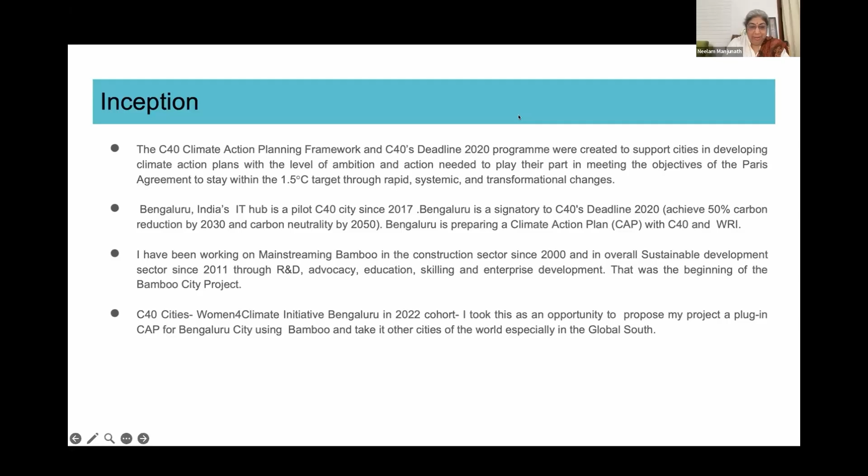And okay, sorry, this is just a moment. Just a moment.

This is the project at a glance, generally taking Bangalore as a pilot. That's the area and the latitude. We have tried to make it into a proper project.

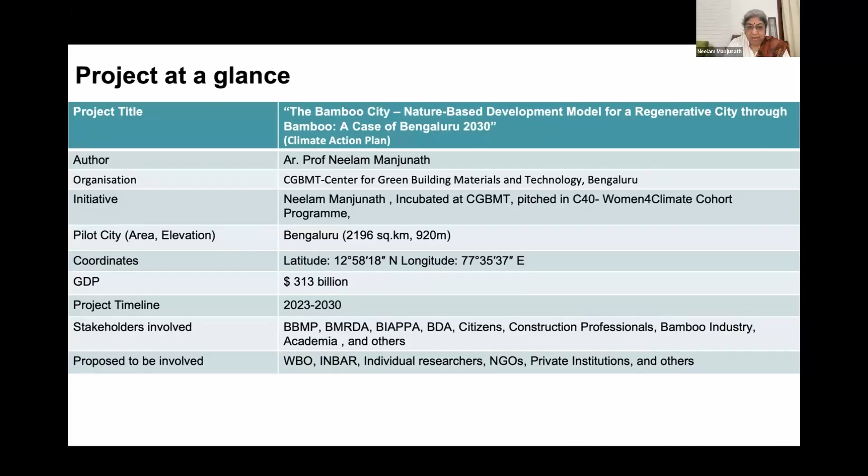The stakeholders are local civic bodies and government bodies, industry professionals, and international organizations like WBO, INBAR, and many others which we are planning to involve and collaborate with one by one.

The important sectors addressed - I am not just talking about construction with bamboo. This city project actually talks about urban greening, air quality, water resource management, energy and waste management, community resilience, and the well-being of the overall citizens.

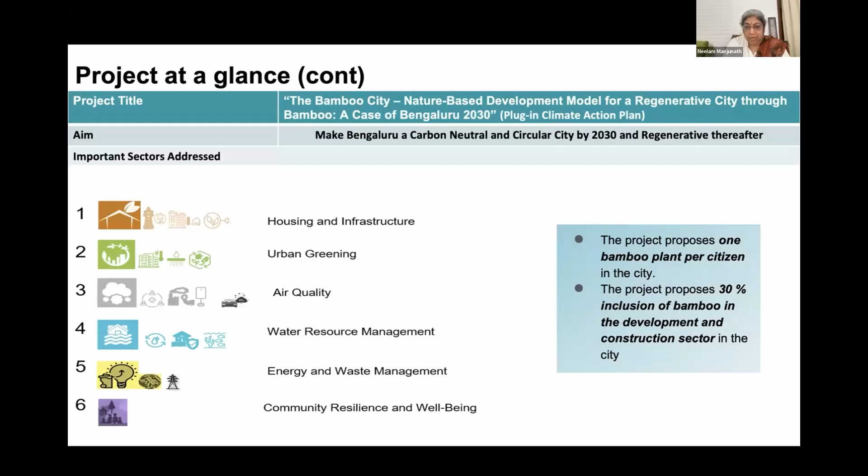There are two very simple actions that I have proposed. One is that we plant one bamboo plant per citizen in the city. The second one is that we have 30% inclusion of bamboo in the development and construction sector.

Why is bamboo a nature-based solution, which I call NBS? It has very dense foliage. It absorbs 400 kilos of CO2 per plant per year, and releases so much oxygen. Decomposition fortifies the soil with the fallen leaves, and there's a lot of leaves that fall.

The rhizome holds the topsoil together and prevents soil erosion. It also changes the microclimate through reduction of temperature and increase in the water table. It helps in removing toxins from the soil, which is phytoremediation, and it reduces dust levels by 70 to 90%.

Bamboo also enables displacement of plastic, which is a very important topic everyone has been talking about - the green circular economy. And renewable energy from bamboo, through gasification - I am more focused on gasification and renewable energy from bamboo waste from industry.

Bamboo is a pioneer for preventing soil erosion, enrichment, reforestation, carbon sequestration, and regeneration. Bamboo is part of a regenerative cycle - most bamboo enthusiasts know this.

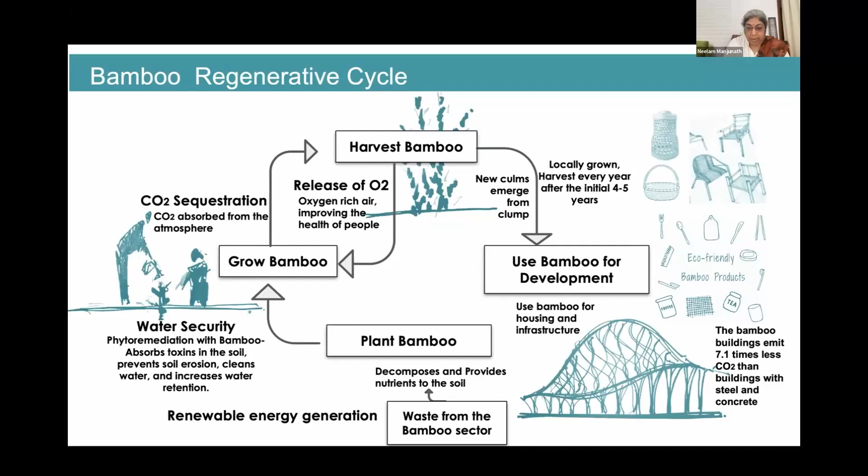This is a common thing everyone asks: why not other trees, why only bamboo? We know bamboo grows very fast, so we don't have time to wait for slow-growing trees to provide all the oxygen and urban greening we're talking about. That's where bamboo comes into the picture.

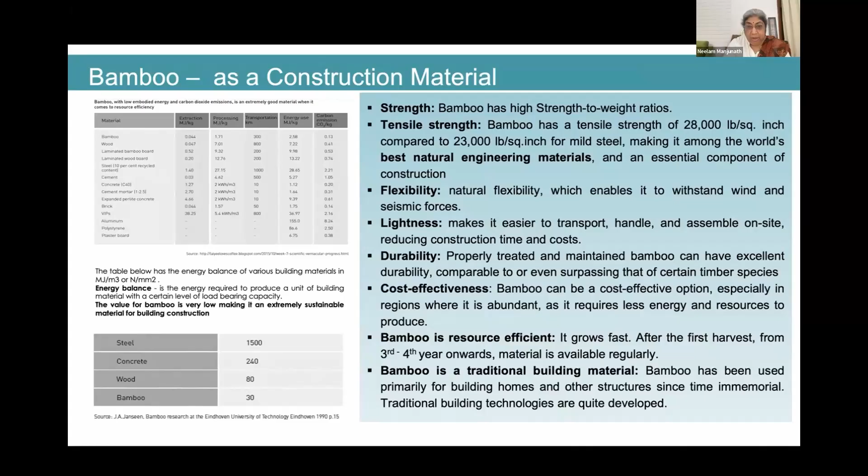As a construction material, which is the topic of this forum, bamboo has got all these properties. Many people in the forum know about its strength and tensile strength, the very good flexibility it has, because of which it can withstand wind and seismic forces, lightness, durability, and cost effectiveness. All these properties are there. I think one of the biggest, most important is that it's resource efficient, and it's also a traditional building material, so people know the material very well in most countries where it grows naturally.

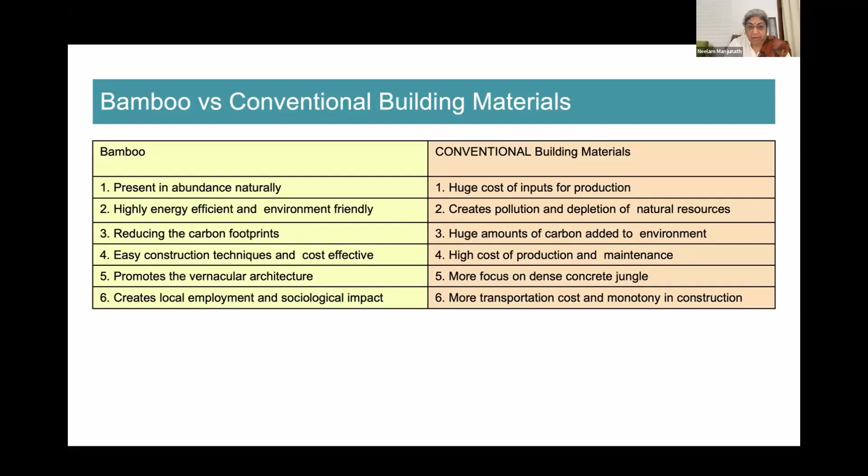There's also bamboo versus conventional building material in terms of abundance. Bamboo is highly energy efficient and eco-friendly, reduces the carbon footprint. We also have easy construction techniques, until we really want to make it complicated - that's a different thing altogether. It's cost effective, promotes vernacular architecture, and creates local employment and sociological impact.

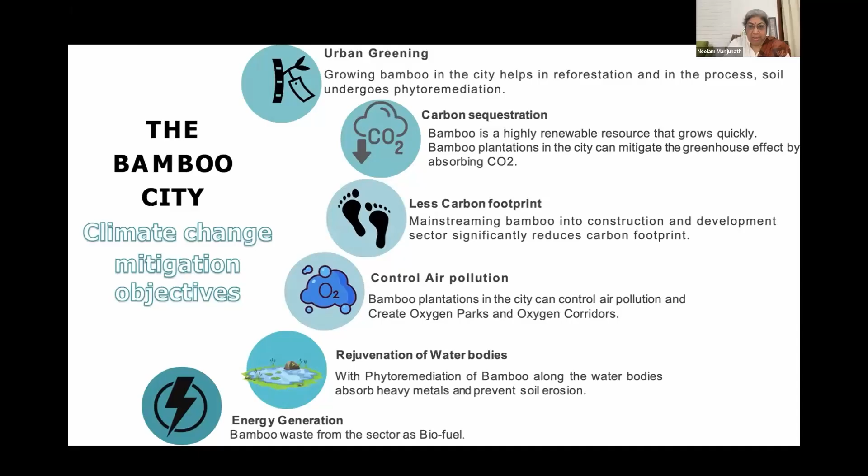The bamboo city's mitigation objective is climate change via urban greening and carbon sequestration. We have less carbon footprint through development, controlling air pollution, and all this rejuvenation and energy generation we're talking about. Now, can we make a bamboo city anywhere?

No. What we propose is wherever bamboo has been growing and being used so far - it grows naturally and is being used by the people, and people are used to it - that's where we propose it. Bangalore was one case where we have a lot of bamboo, and it grows naturally in Bangalore and the nearby areas.

We have a lot of bamboo markets strewn across the city, and lots of local craftsmen on the roads in many places who have been working for generations. We also have a lot of R&D institutions - the Indian Plywood Industries Research Institute is here, and IWST, the Institute of Wood Science and Technology. There are many other organizations working with bamboo, premier institutes in Bangalore, India.

In terms of development, we had the Bangalore International Airport, which was the first in India to use bamboo in an airport. I'm very proud and happy to say, as a material expert, I was contacted by SOM New York for vetting the design of this particular project and for providing information on how to use bamboo in a project like this.

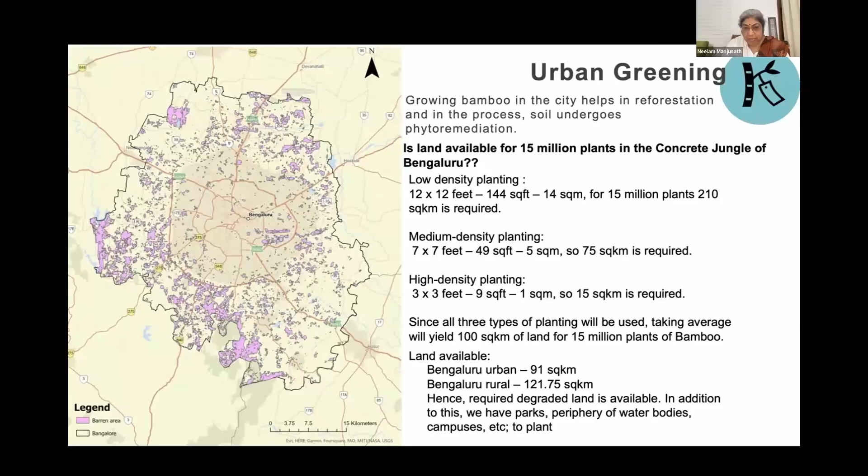So we went around one by one, understanding whether we have land available and what kind of lands we can actually touch. For urban greening, we tried to identify what kind of lands are available and what kind of density planting we can do - things like 12 by 12 feet and 7 by 7, generally with mixed planting, depending on land availability. This was one exercise we did.

We also had our scientists who have been working on bamboo in Karnataka identify different species for plantation in the city, their properties, where they can be planted, and their usage post-harvesting. We did this exercise very early in our project.

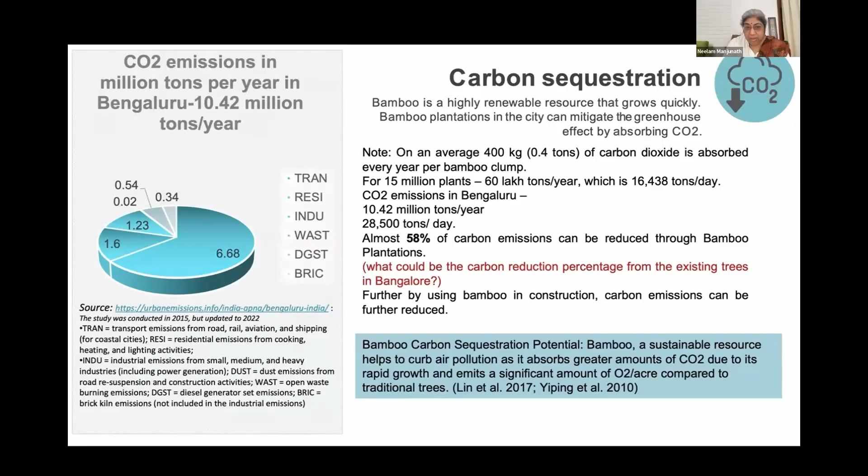Looking at how much carbon sequestration I'm trying to do by planting one plant per citizen, and how many plants Bangalore will require to become carbon neutral in the next decade, we did a back calculation starting with the CO2 emissions that Bangalore actually produces. We found that if we do one plant per person, we can mitigate almost 58% of carbon emissions through bamboo plantations.

This can be done in different ways through oxygen corridors and parks. All of us have heard about oxygen parks and corridors, which have been done in small pockets across the world. Here, we are trying to figure out, per person, what we are proposing. One bamboo per citizen is very difficult to plant, but do we need that, and how are we going to go about it?

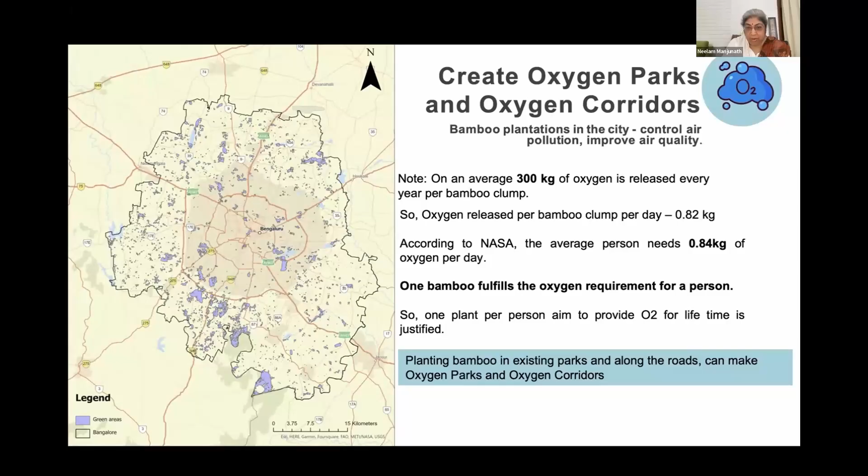The amount of oxygen released by one bamboo clump almost matches what a person requires per day, so we thought this was a good thing to pursue. Through this, we also looked at rejuvenation of water bodies and lakes, the Raja Kaluves, which are the catchment areas of lakes in Karnataka. There's phytoremediation, water quality improvement, water retention improvement, and other side benefits to planting bamboo.

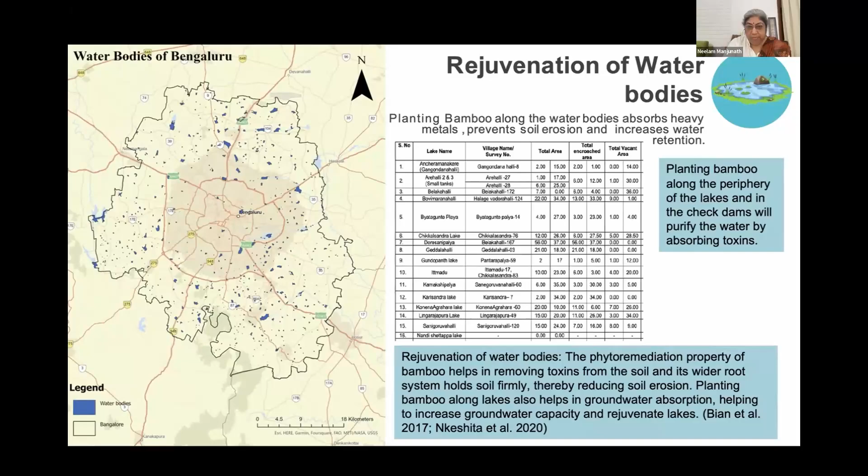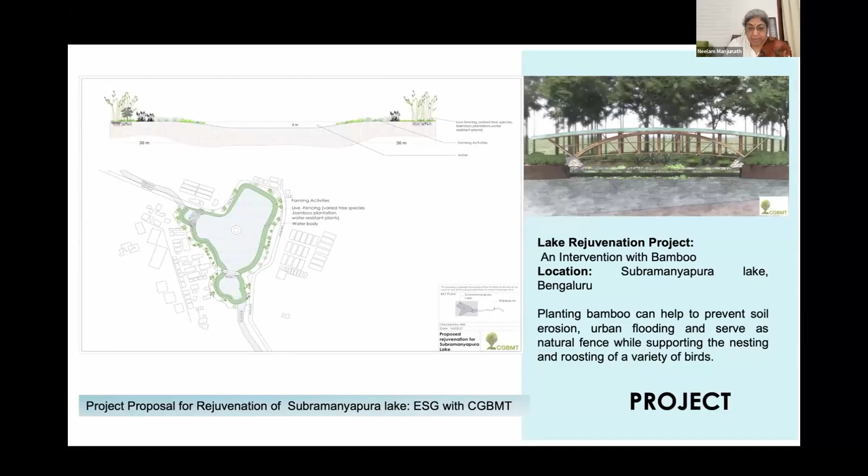We looked at cases done before in other parts of the world. Before COVID, we were asked by Environment Support Group, an NGO in Bangalore, to propose a lake rejuvenation project using bamboo, and we submitted this to the High Court of Karnataka. It has been approved for implementation.

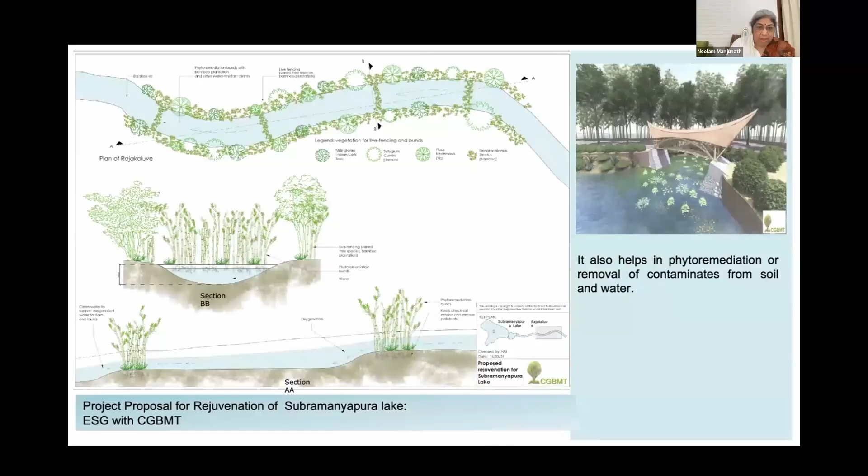We had check dams and other infrastructure done with bamboo, like bridges. That's what we did. Now we're coming to buildings.

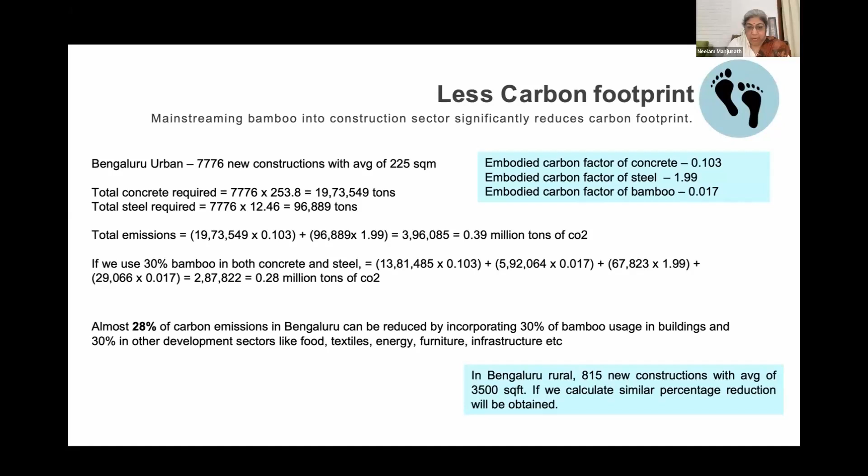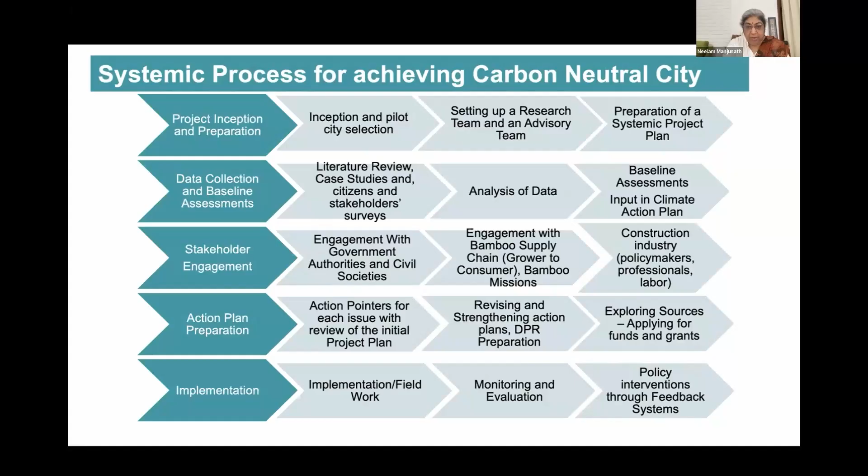It keeps working because every time we encounter new issues, we go back and talk to new stakeholders, conduct surveys, and form collaborations. We keep going in circles, and we've kept it a very dynamic framework through which we are working on this project.

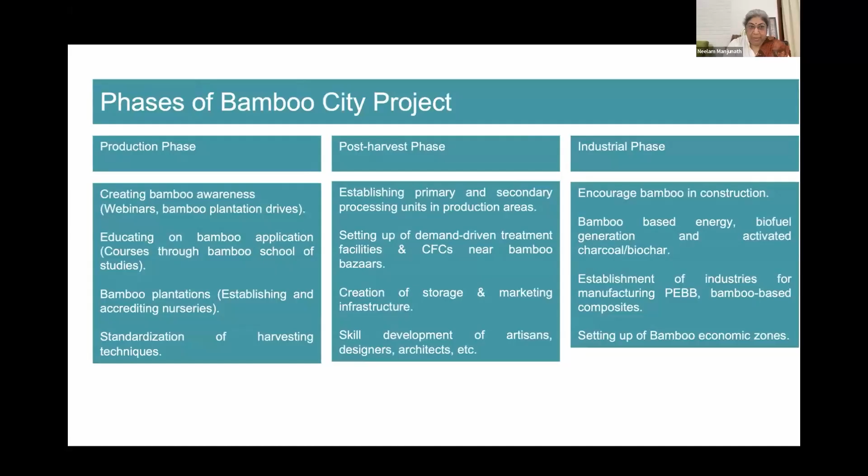And these were the different phases that we looked at, from production to post-harvest to industrial phase.

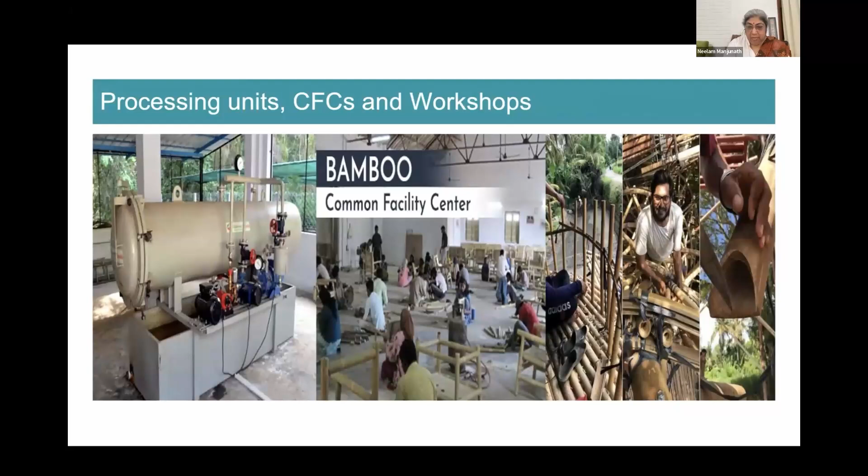But the other two parts we really have to work a lot on in the city, which could be looked at in north, south, east, west, four common facility centers at the edge of the city to start with. Gasification from the waste that will come out from the industry.

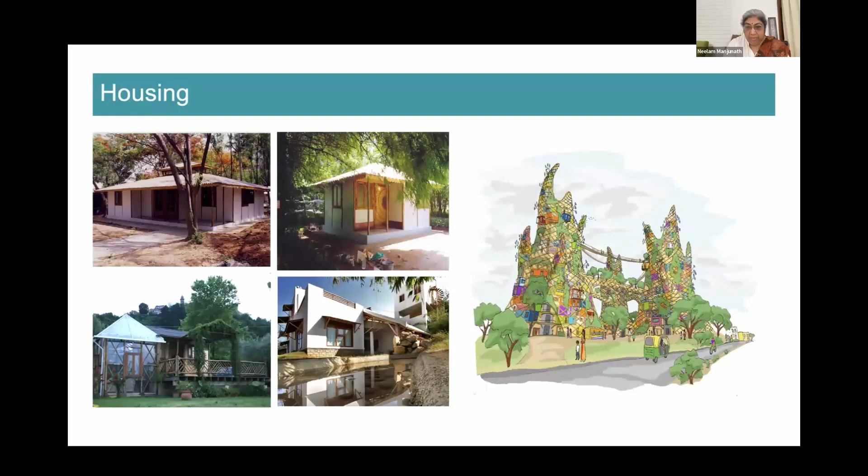The other projects, most of them are my own, which I have been working on since '99. They have been housing, starting from a 2-bedroom house to an upmarket house, to a prefab house, EWS economically weaker section house, and slum. What you see on the right side is actually for the slums. It was a slum development program for which we got an international award for this particular project.

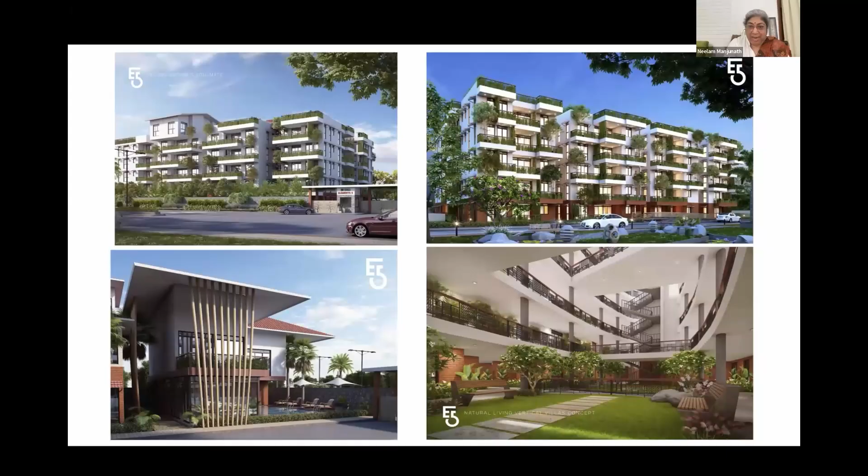Again, even in the normal housing of day-to-day people, because I don't work at either the shack or the 5-star deluxe hotel level. I'm talking about people in between, which actually form 99.9% of the population, and the buildings which fall within that range. I work towards Bamboo City working towards that kind of architecture and that kind of construction that we are actually talking about.

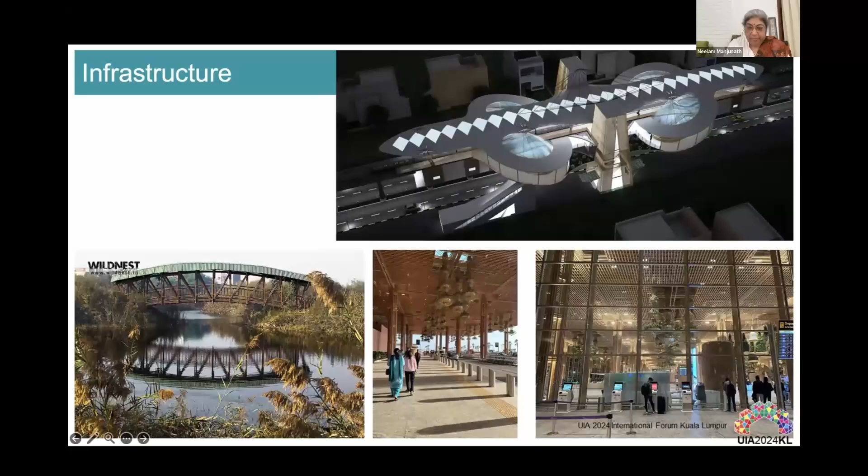This also won the Rethinking the Future Award in 2017. Unfortunately it has not been built so far, hoping it will happen very soon. Then we have bridges that can be done with bamboo, and smaller community infrastructures like bus shelters, public toilets, rain shelters.

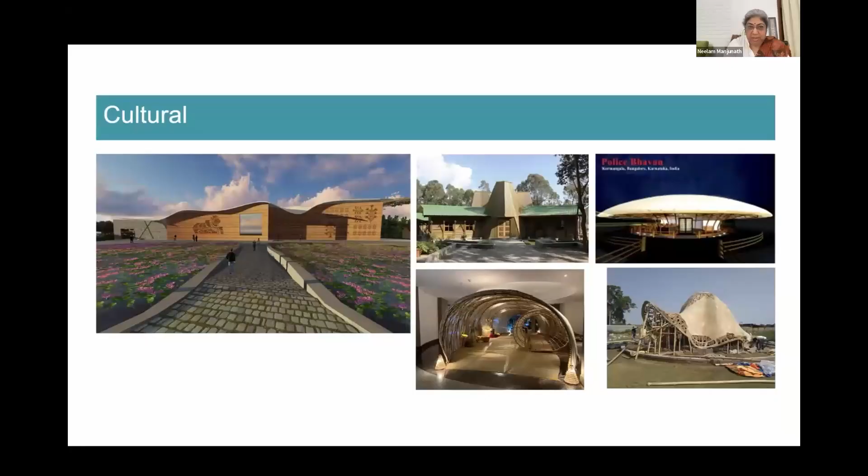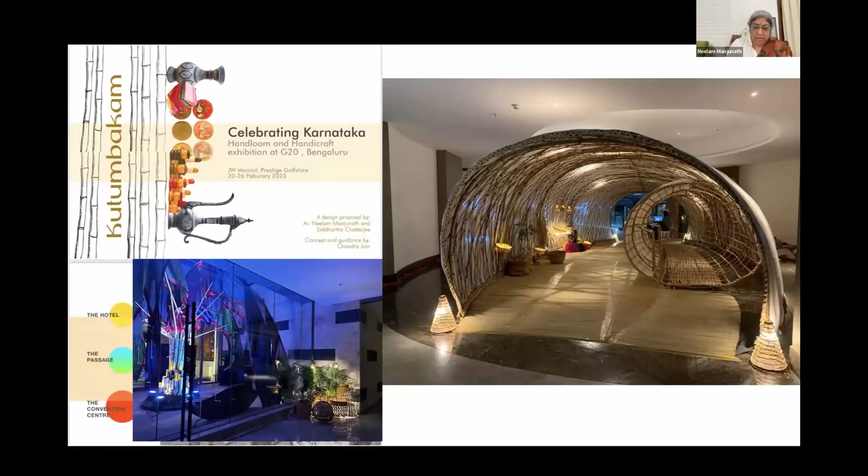Cultural structures like museums and other kinds of exhibitions. This is what we did for the G20, which had to happen in Bangalore. We were called to do that. We can also do lots of different kinds of park structures with bamboo.

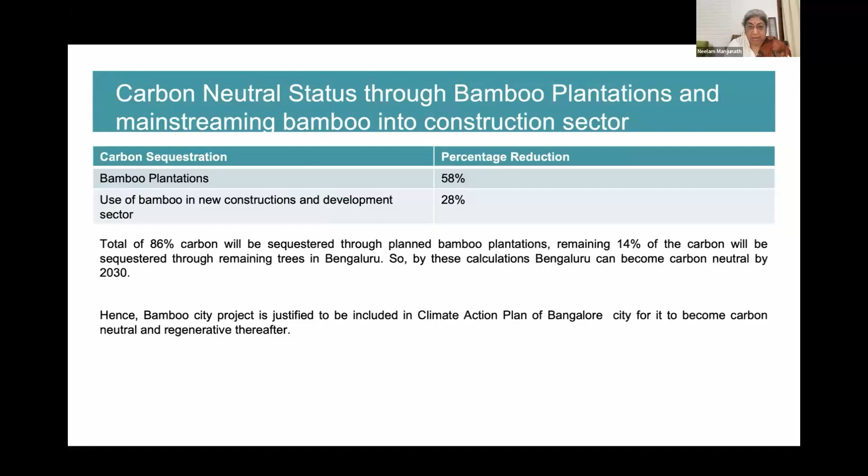And I'm hoping that this will come soon enough. This is the carbon neutral status I was talking about, 58 and 28. We have 86% sequestered through these bamboo plantations, and 14% could be done through other means, like the lot of trees in Bangalore. I'm very sure this is an achievable target.

What all works we have done here so far, I'm trying to get this into different kinds of things: advocacy, academics, capacity building, codes, schedule of rates to be put in the government rates, and R&D, a lot of R&D that needs to be done. And collaboration for on-ground implementation, because I definitely do not want this to just become a research project or a report.

So I'm very much for on-ground work, and very happy to say recently the local body, Greater Bengaluru Authority, has given us a letter of collaboration, and we are working with them further. We also have an MOU for partial support for a year from the World Bamboo Organization, who will be providing some support to us.

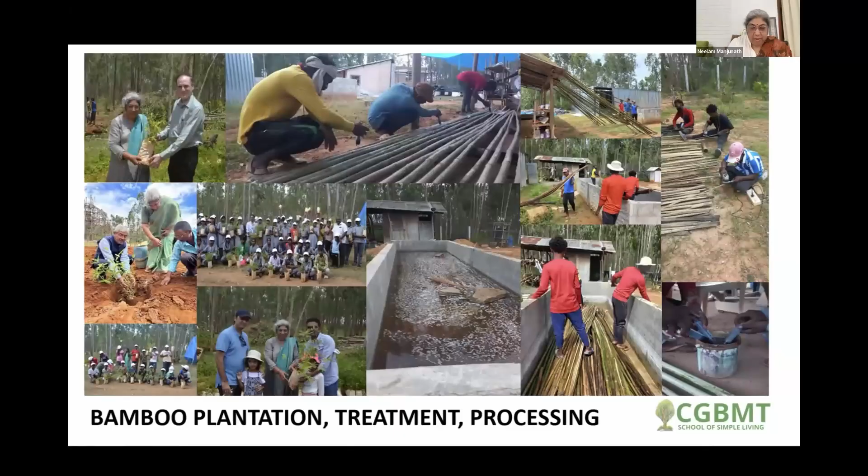And these are other ground supports for which we are moving on to different people: community funding, seed funding, raising awareness. These are other activities that we have been doing towards it at our center, which is near the international airport of Bangalore, Devanahalli.

We are doing all these works, a lot of advocacy, seminars, collaborations with the Council of Architecture, engineering colleges, and many other organizations. We are looking at a lot of collaborations. We have done, I think, around 16 collaborations so far for the project.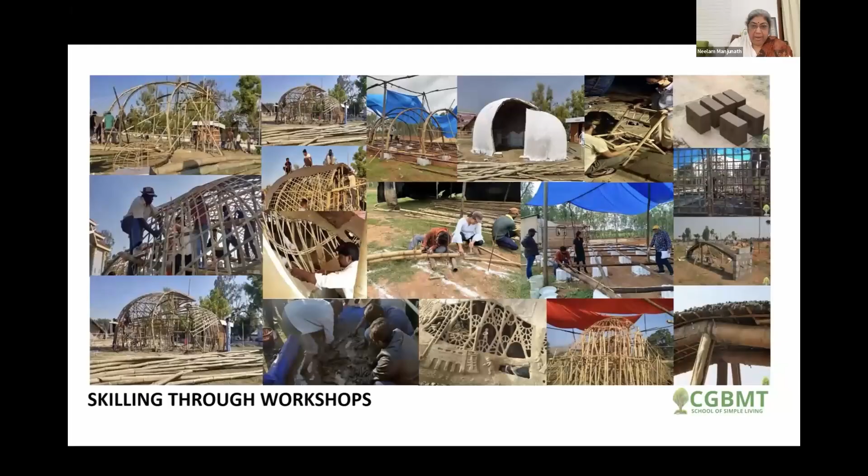We are doing skilling, a lot of skilling that we have been doing, and we are planning again to rework on the new kind of models that we want to do for this year.

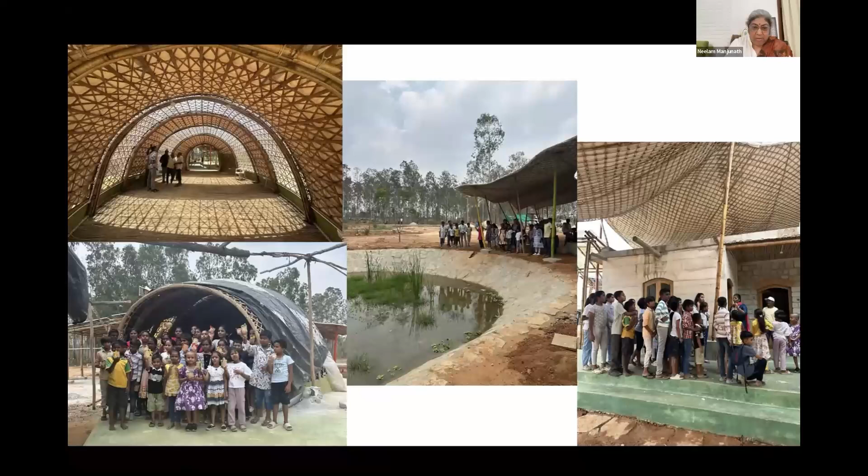This is the place, the School of Simple Living, which I was talking about, our headquarters, which is under construction. These are the CGBMT headquarters, School of Simple Living, Bangalore, India. Now some of the structures are complete. There's still a long way from completion, but we have started, and you can see all these rural children from the nearby villages, they come for their summer camps and things like that to the place.

And so now on ground, as I was talking about, in 2024 we have the Indian Institute of Interior Designers. They gave us a chance to present our project to the citizens. And for 7 whole days, we did different workshops, different kinds of presentations, talks, and everything. A lot of citizens actually came to us, and we had a very good chance and a very good response from this.

We also did the same exercise in the same year, last year, in Nagpur, and Honorable Minister Mr. Gadkari, who is a champion of bamboo in the country in the political circles, was also very happy, and said he would like Nagpur also to become the next bamboo city, if not before Bangalore.

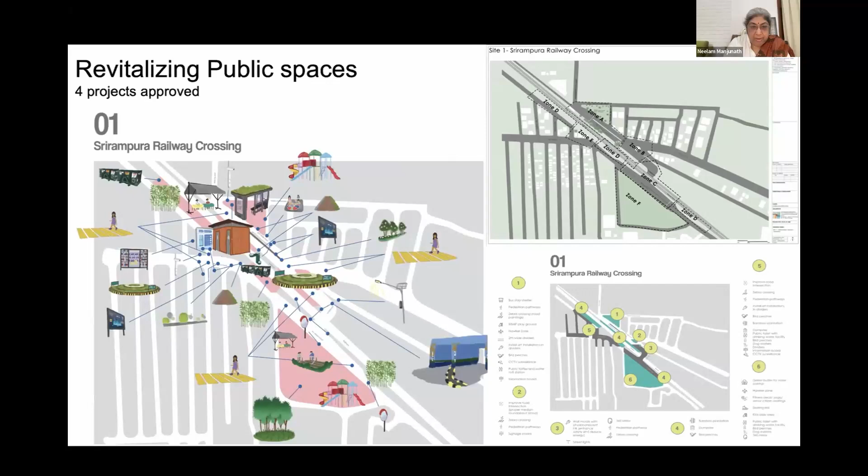In this we have infrastructure and bamboo plantation combined. We are not doing only bamboo plantation—I don't believe in doing everything with bamboo at any point. But the moment we mix bamboo with everything else in a composite manner, I think things will start working, because it becomes visible instead of being put over their head. That's my strategy, to start with and work with.

In conclusion, nature is regenerative by default. Unless we humans really interrupt things, ecosystems are life-sustaining. So what we need to do is intervene very gently, and that's the model of a regenerative city we are trying to propose through this Bamboo City project.

This has to be inclusive, equitable, resilient, and safe urban spaces, clean water, this whole thing. There could be a question: why can't we grow bamboo outside Bangalore? If we grow bamboo outside and then bring it all the way from Assam, 3,000 kilometers, I don't think bamboo remains sustainable anymore. That's one thing we are looking at.

Also, the whole ecological property of bamboo—citizens can actually use it for clean water, urban spaces, and local livelihood options. So it's like a city in a park, not a park in a city. That is the model, and that's the whole thing about it.

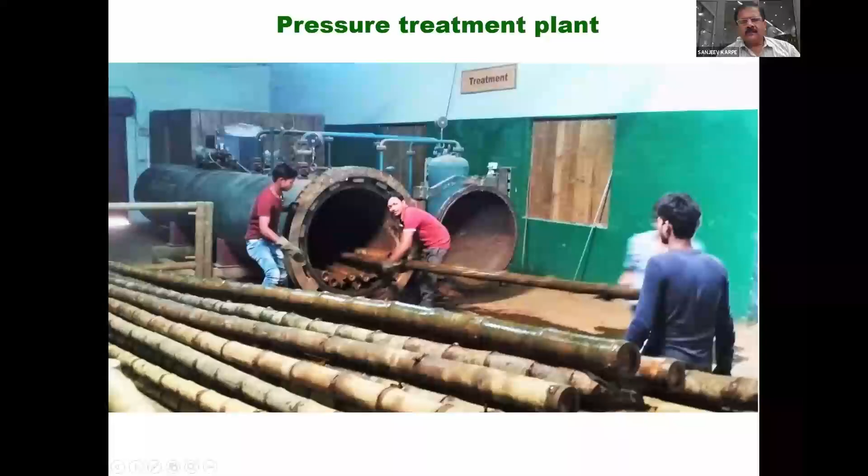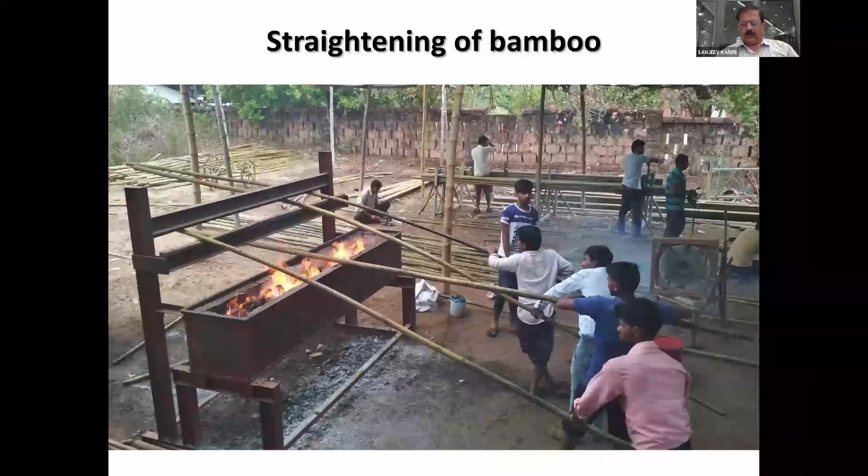We have a common facility center where primary processing machineries are available. We have trained our artisans to straighten bamboo using heat, a traditional method in India. We have trained our farmers to make bamboo as straight as pipe.

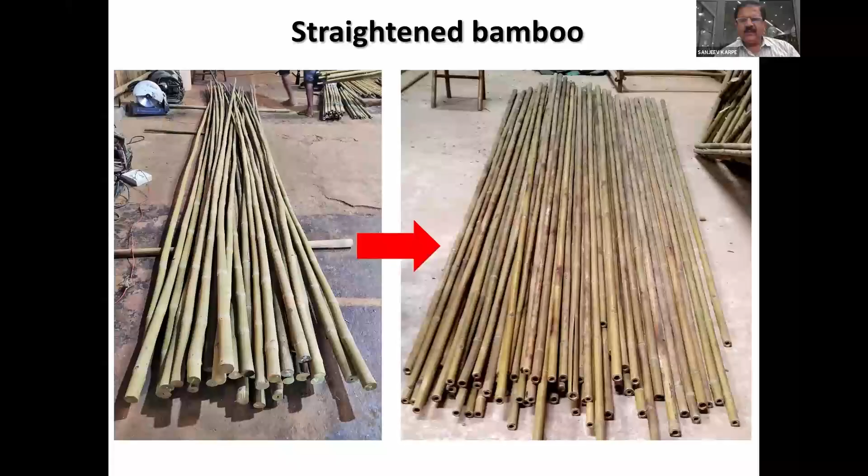On the left side is the bamboo, species Dendrocalamus stocksii, which is fairly straight, but on the right side is straightened bamboo. Using the same method, we can straighten bamboo with such uniformity that we've succeeded in converting bamboo into a commodity. Whatever size and shape you tell us, we can supply bamboo to that requirement.

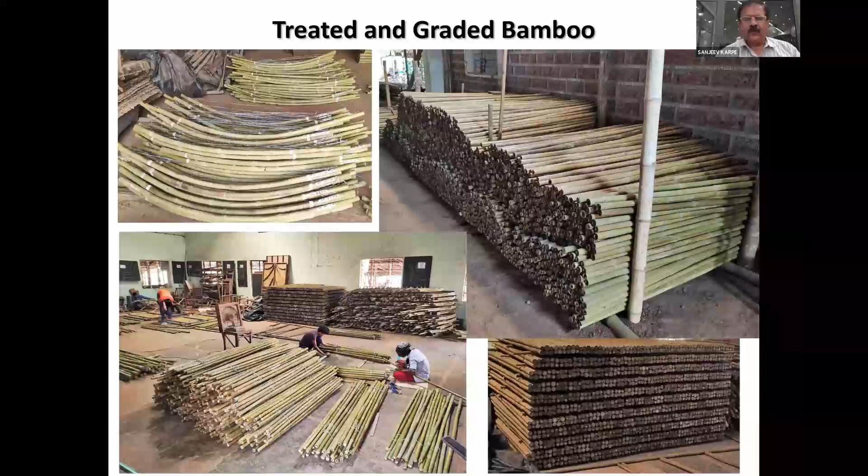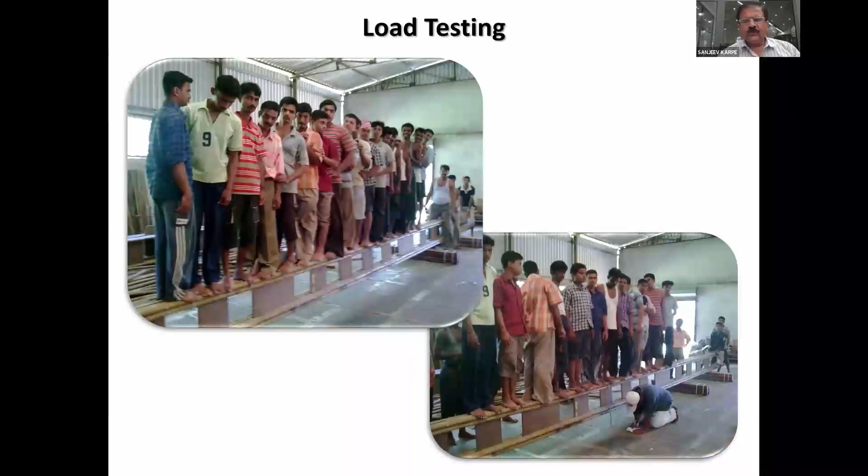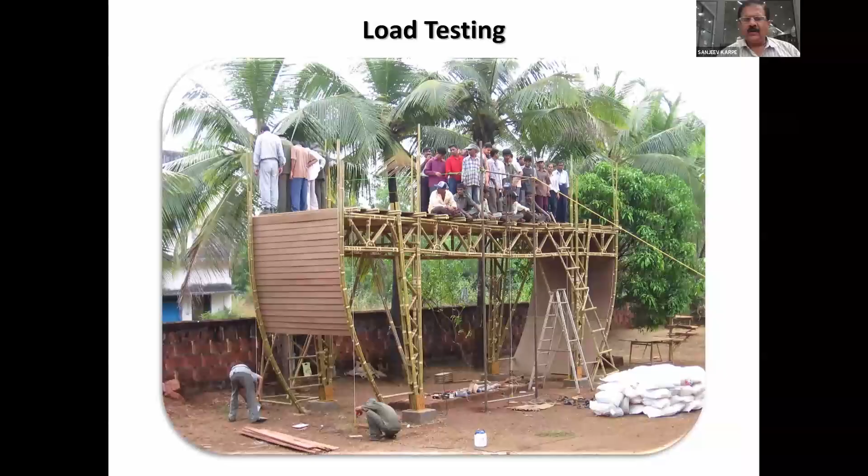Load testing is also done in-house to ascertain the species' strength as per the structural engineer's design calculations. Then we transport these components using longer trailers, and this is the actual construction on site.

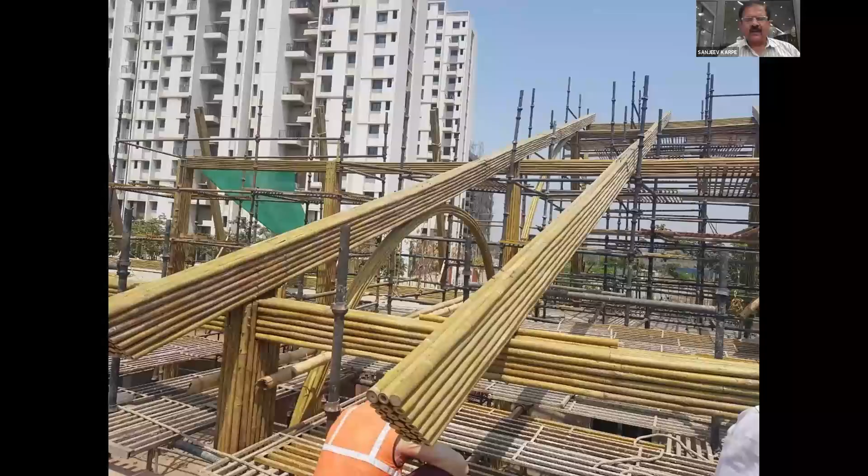Because we prefabricate construction components, it is easier for us to do construction on site in comparatively lesser time.

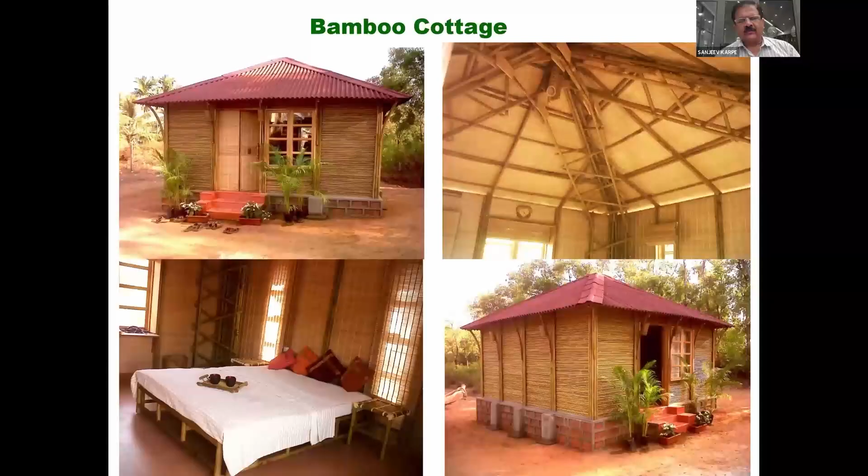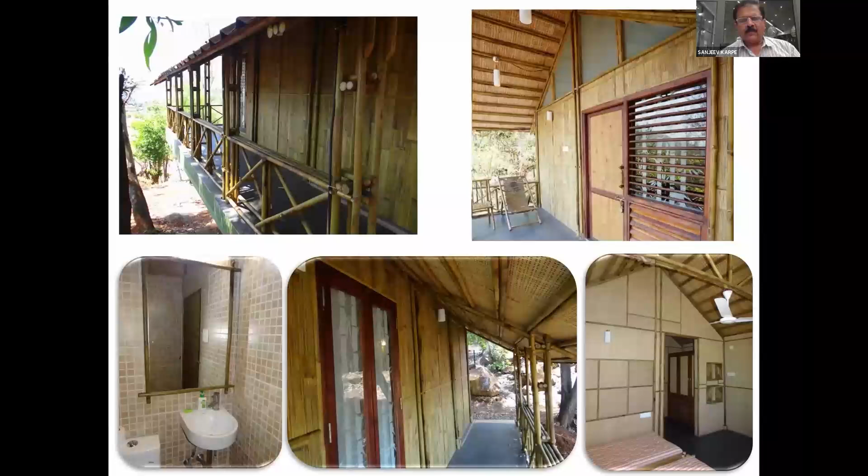These are a few projects which we did across the country. Let me show you first some small cottages, suitable for tourism purposes. These are bamboo cottages we built for different types of clients at different locations, trying to achieve aesthetically beautiful and durable structures, keeping in mind the needs of the customer, particularly in the tourism sector.

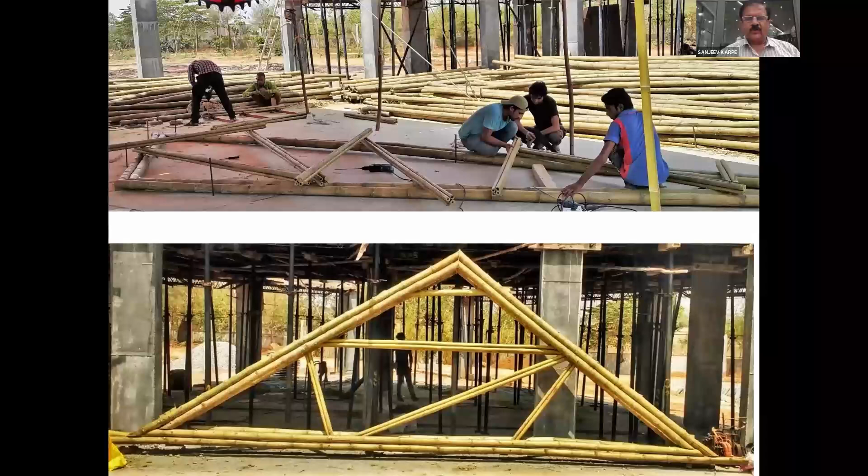We did this first bigger structure, a 10,850 square foot clubhouse. The species used here is Bambusa bambos with around 100mm diameter, and Dendrocalamus stocksii, which is a 50mm diameter bamboo. All the components are prefabricated and then erected on site.

This gives us confidence that bigger structures can be done with our team. This structure has a span of around 52 feet, which we were able to achieve. The roof is completely in bamboo, with no hidden metal members used in this roof.

Then we started getting repeat orders from private customers. This is one more project we did in Nandi Hills in Bangalore. The roofing material used here is also bamboo, a flattened bamboo shingle, and this is the welcome lounge of a real estate project.

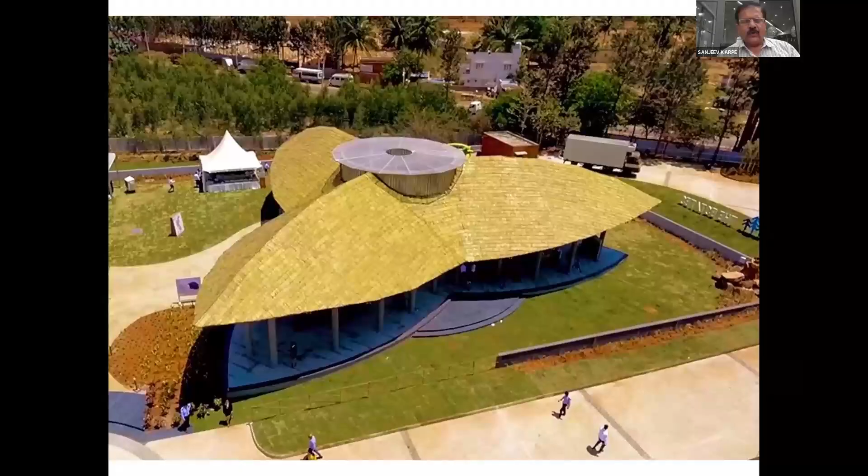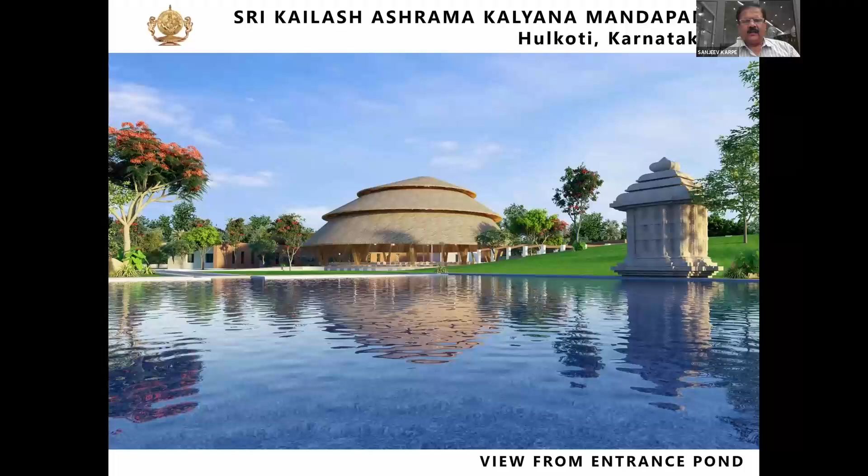We are happy that we could get the needed support from the customer. Customers started getting value for money from these types of structures. Then we thought it was time to take one more step, and decided to create a construction methodology where construction should be done just like a pre-engineered building in metal.

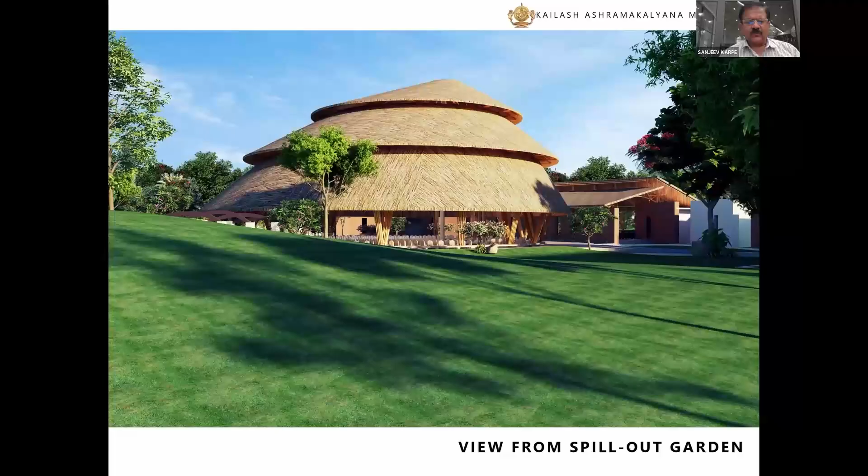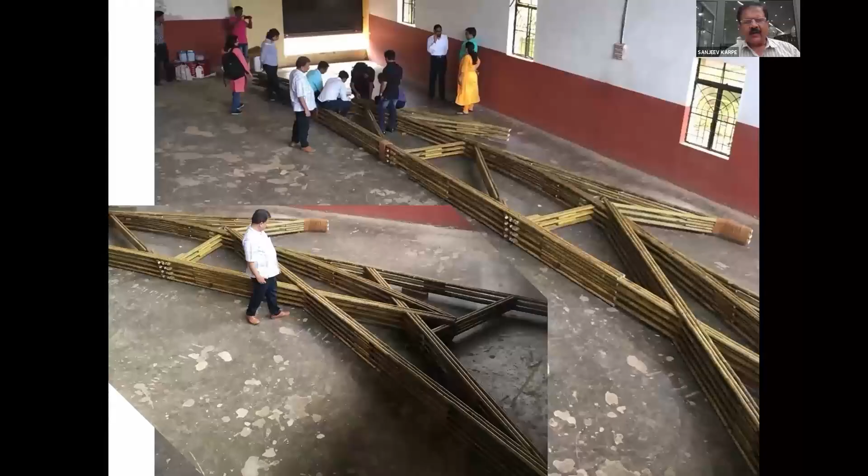So this is a banquet hall. We got a chance to work in Karnataka again, and this is a 24-meter span structure. These are the render images, and we made all the components in the factory like this. Then the re-erection is done on site using cranes.

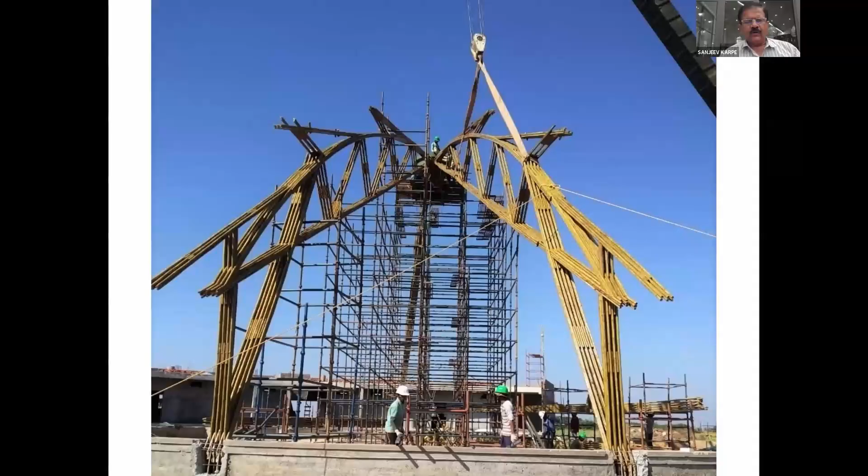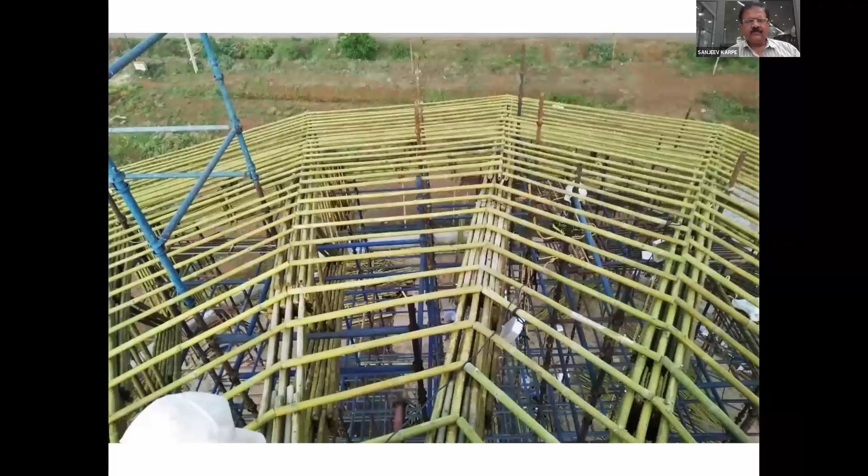All this erection is just like a pre-engineered building. Not even a single hole needs to be drilled on site. This 24-meter structure could be erected in a lesser span of time. You can see the uniformity we could achieve, and again, the roofing material here is flattened bamboo shingles. Ultimately, this is the final look of the structure.

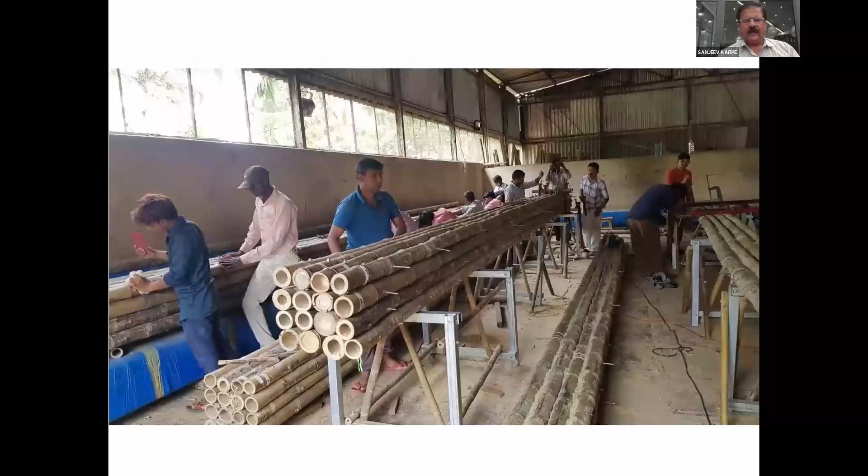Because of this pre-engineered method of doing a bamboo structure, we got the confidence, and the government of Maharashtra gave us the opportunity to build this 1 lakh square feet institutional building. It's a research station, a research institute of the forest department of government of Maharashtra. So we prefabricated the components again in the factory. This is a Bambusa balcooa species with around 100 diameter, and this is how we did the erection on site.

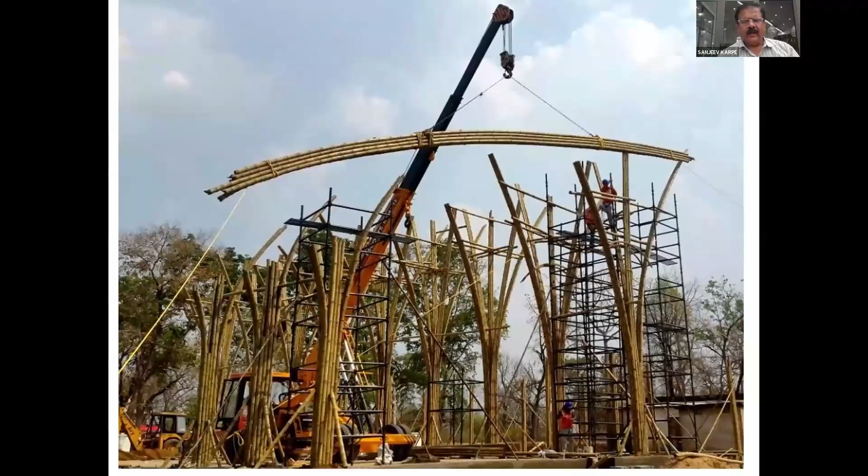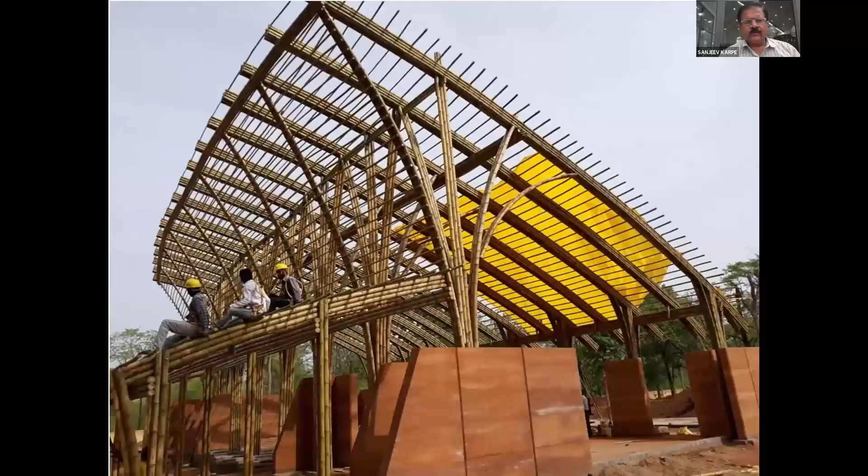Walls used here are rammed earth walls. Because this order is from the government, we got the opportunity to do necessary work with respect to schedule rates of a government department, meeting their standards.

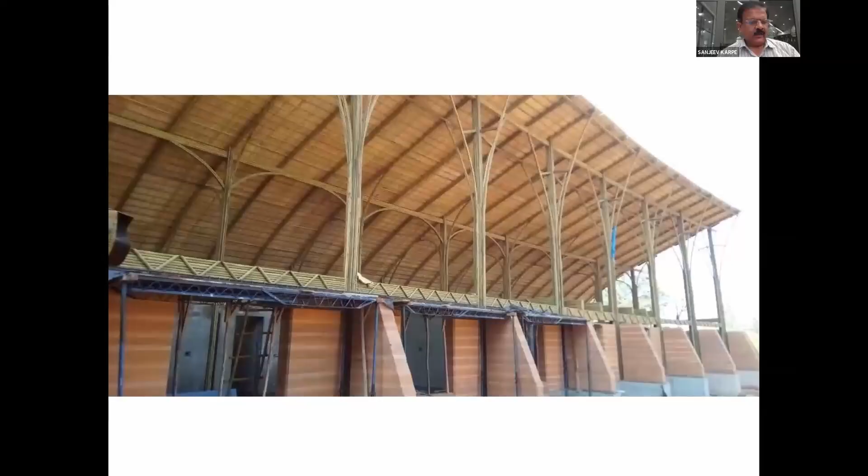This is one more structure, this time with a smaller diameter of bamboo. It's 50 dia bamboo, Dendrocalamus strictus, and even a bigger span structure can be done using this bamboo. We got the opportunity to build this.

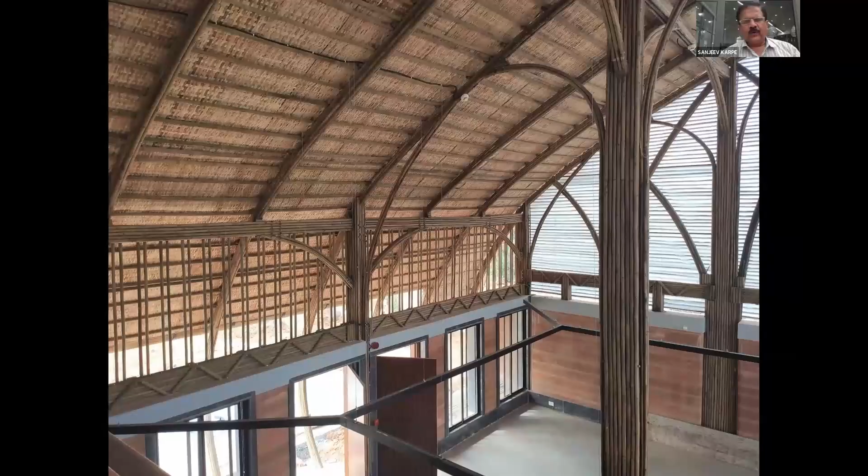So the complete skeleton is made of bamboo. The roof is also bamboo - you can see this roofing material completely done with bamboo shingles. The complete 1 lakh square feet of this campus is done using bamboo and rammed earth walls.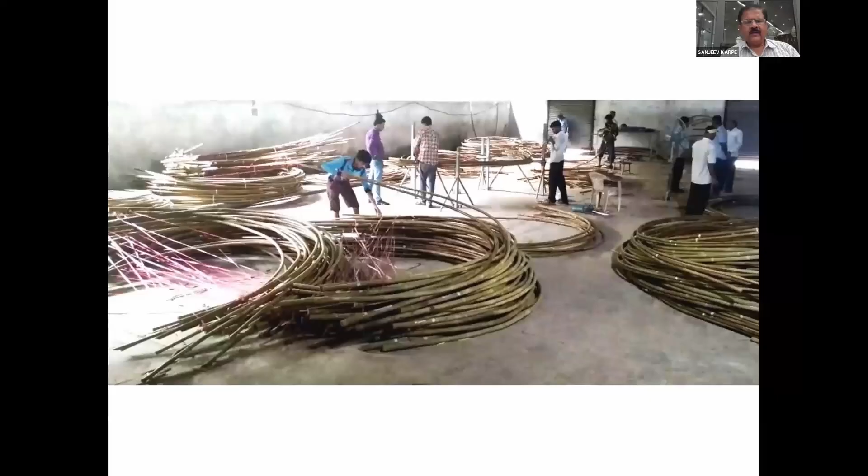We participated in an international tender and could beat many other competitors from different countries. This complete restaurant, designed by architect Sticks and Stones Tribe, was done by us. Again, we did all the components in our factory, and then this is the actual work on site.

So this is structural design by us again. We submitted a design calculation to Waldorf Astoria, and we could eliminate all the metal components they had used initially in the design. The initial design had main members that were pre-coated metal pipes with bamboo infill, but we could change that, and a 100% bamboo structure was created by us.

This is a very high-end resort and got an excellent response from the client. This is an actual photograph taken from a drone, and this particular project has been rated as one of the world's top 16 best waterfront restaurants by CNN UK. It also got a rating from Forbes.

Then we started getting repeat orders from abroad. This is one more project which we did in Maldives, a Zuma restaurant, again using a bamboo roofing material. You can see this particular shape has been achieved due to the accuracy we could bring in our fabrication of bamboo.

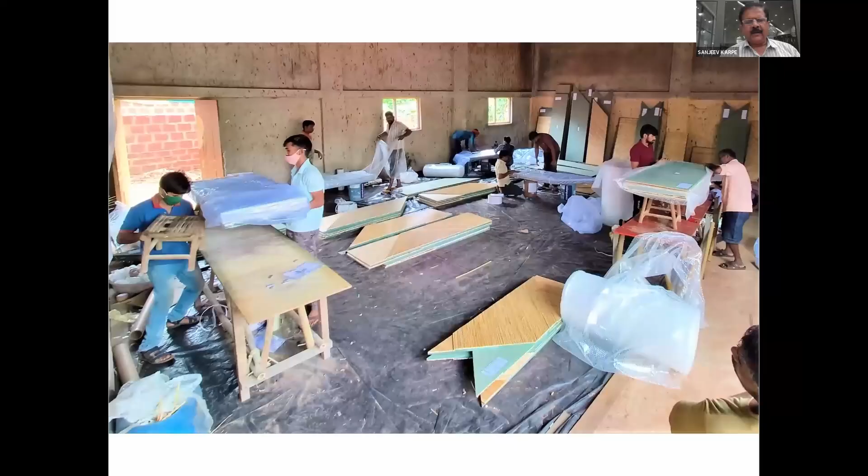We again got this international tender, and all the panels were prefabricated in a factory like this, then taken on site for the actual erection. This gives us confidence that bamboo can be a material for premium use also, and that Indian bamboo and our technology is globally competitive.

Then we slowly started getting orders from Indian resorts also.

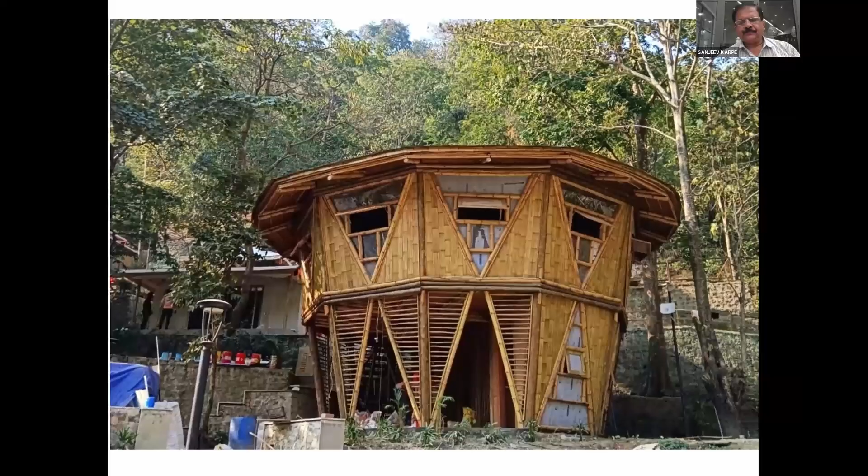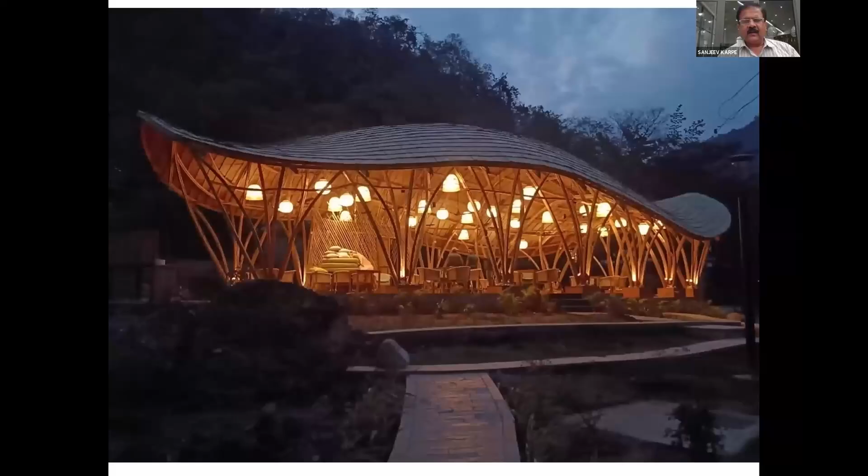This is the Oneness Resort by Ganga Kinare. We built these cottages for them, and a restaurant building. This shape and beauty which we were able to bring in, ultimately the client is extremely happy with the end result, and he's fetching much more clients and getting much better rates than what he used to get. This gave us again confidence that yes, in India also people, our customers are getting value for money for all this work.

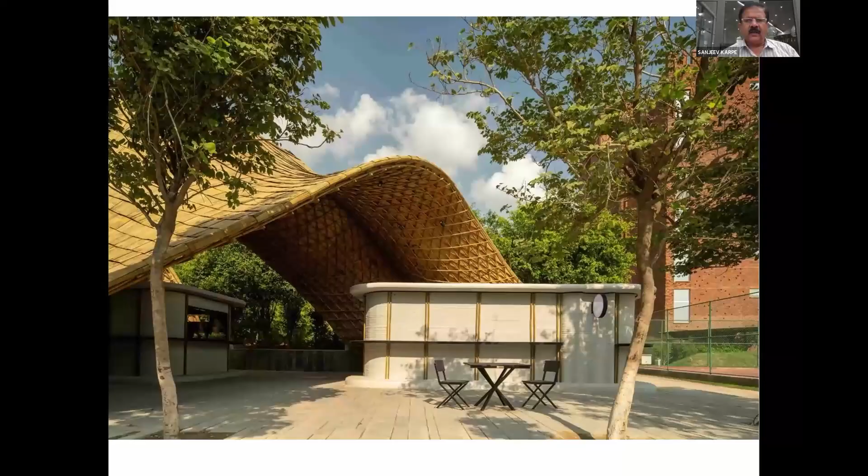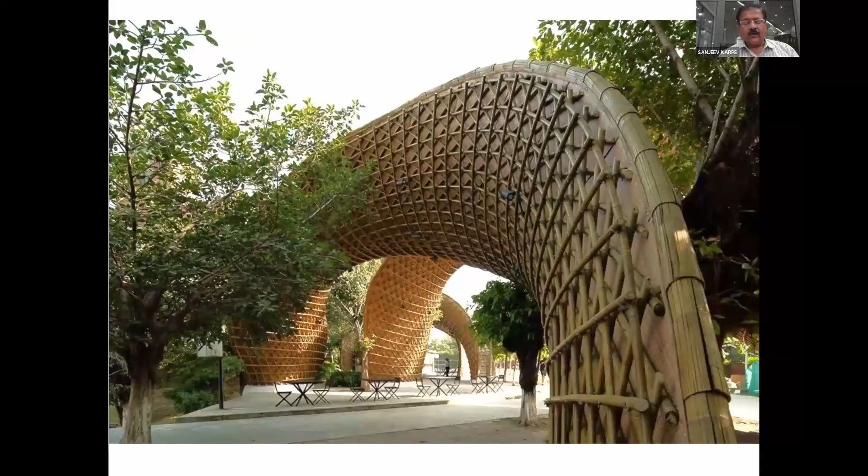We got the opportunity to work for Ashoka University also, one of the leading universities in our country at Sonipat near New Delhi, and we got a chance to do the roof for their canteen in the campus. This is the grid shell structure which we did for them, and everybody appreciated it. The university also is extremely happy with the end result, and our client definitely got value for money for this type of project.

This is getting very good exposure. Thousands of students and all the visitors are really appreciating this type of bamboo structure, and this is really encouraging for all of us in India.

Then we did this resort, a very high-end, five-star resort, Timbertail, in Coorg, Karnataka. All these structures are made using bamboo. This shows that yes, very high-end structures, very high-end resorts also get value for money for this type of bamboo structures, and we are getting more and more clients who are interested to build this for their projects.

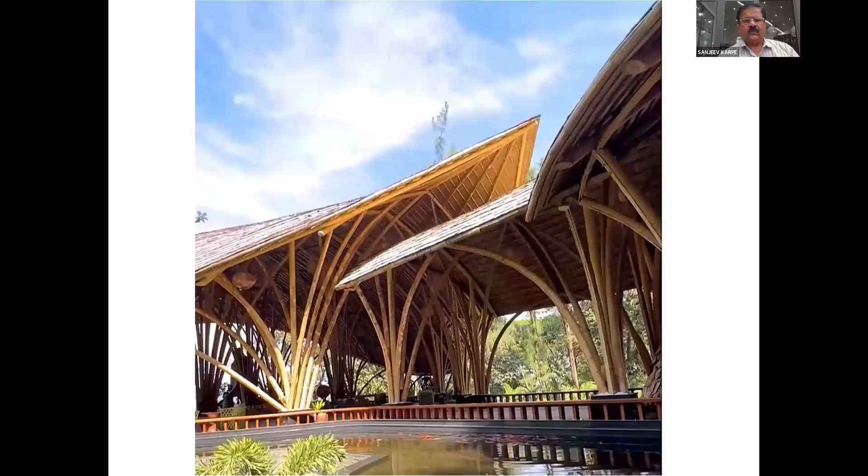Our aim is now to see how we can scale up using prefabricated components, using a technique like pre-engineered building. More and more people are showing interest in really doing this type of construction. I'm very sure that more and more agencies will come forward, and shortly bamboo will become a mainstream construction material in our country. Everybody is now showing more and more interest in sustainable and eco-friendly material.

Bamboo is best suited for this. Aesthetically beautiful structures are attracting more and more people towards bamboo. And once you attract rich people, I'm very sure that upper middle class and middle class people who want to follow the path adopted by rich people, this will create interest among everyone in our country. We are happy that government is also showing interest to promote this material. We now have proper standards and codes in place, and favorable policy for bamboo in our country, and all these things will help bamboo become a mainstream material in our country.

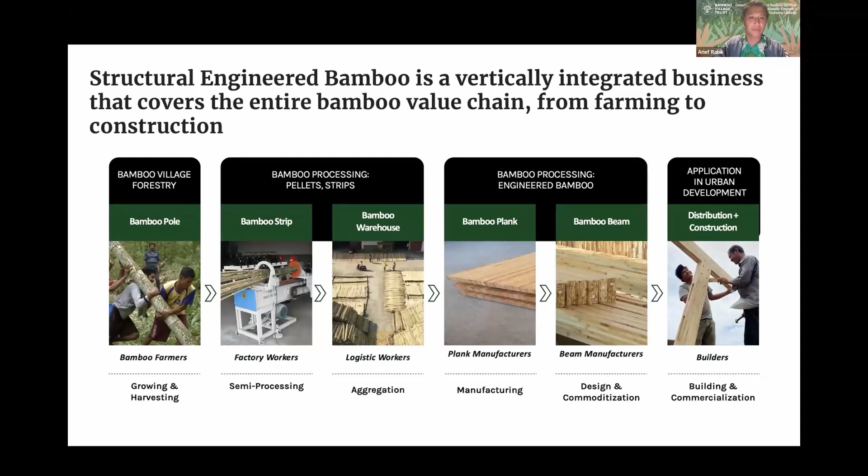Of course, we also look at different market segments and how to stack market segments in the right way. Again, we are still learning and still creating different models here. But bioenergy and waste utilization, and then construction grade panels and materials, are really the two that we have high confidence on. Furniture, mid-tier interiors, of course, in Indonesia, we have a big sector here. SME, craft, and household goods, again, we have a big sector here.

And right now they have zero coherence of this. So we need to improve the coherence. And then, of course, there's issues of testing.

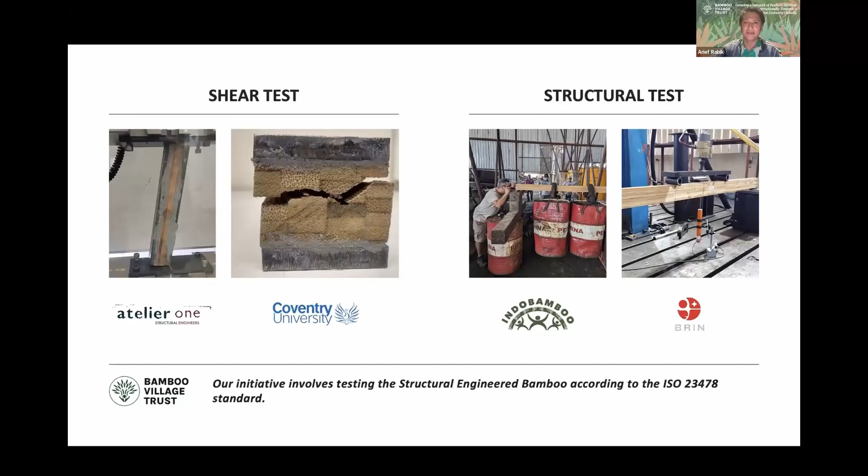For those of you who know Mateo Guterres, that's him on the right there, staring at some laminates in our factory in Indonesia. There are many different types of testing for the different developers, contractors and investors we've been talking to, and we're still at the beginning of that. INBAR has helped so much with the ISO standards, and we, as part of others in Indonesia and two other countries we'll be announcing soon, are really using those standards as a foundation to all of our conversations.

So just a quick overview of how it works: we go through those four phases we talked about before - convening, champion activation phase, co-op activation phase, social forestry asset activation. Then we have a valuation of that forest asset, and with that valuation we create a financial vehicle, or special purpose vehicle, that invests in this village-based industrialization, creating strips and pellets to start with. But of course, you can do many other things there.

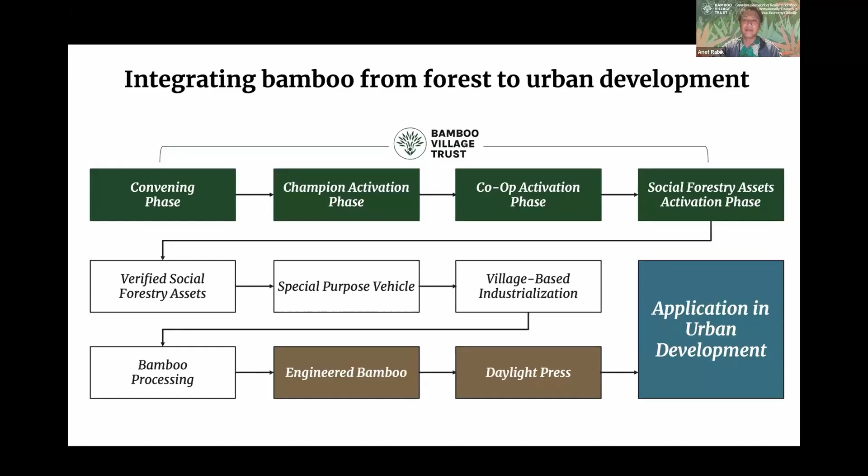From that bamboo processing, we have, for example, engineered bamboo. One of our key KPIs, key performance indicators, is really getting to the point where we have daylight presses - these large 40+ layer presses that can reduce about 75% of the direct costs, which is so important in such a highly competitive world. This is how we can really realize application in urban environments, when we get to that scale. For us, it's roughly 20 bamboo villages.

This is just a quick simulation of the impacts of 1 bamboo village, 6 bamboo villages, and 20 bamboo villages. We have a lot of data and research on this 20 bamboo village model, and we're doing 200, so that's roughly 10 of these. If we can get our systems to that 40,000+ hectare scale and really create ecosystems around that...

That's really how we can help all the different entrepreneurs in the room have the best chance at success, and be able to get a good margin while also being competitive in price - and, most importantly, give the farmers who will be planting and managing these forests, of which, from the UN Decade of Ecosystem Restoration, we say anywhere between 900 million to 1.2 billion hectares of degraded land is straightforward to restore across the tropical belt of the world. It's a huge opportunity, but step by step, we need to structure these business cases.

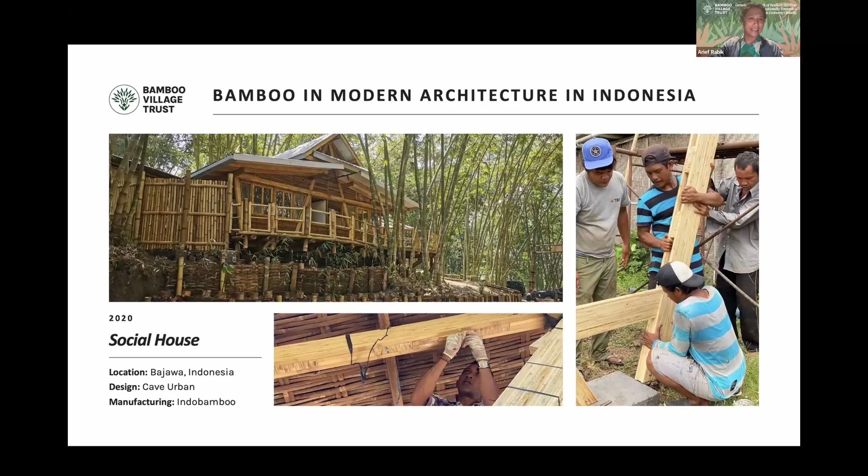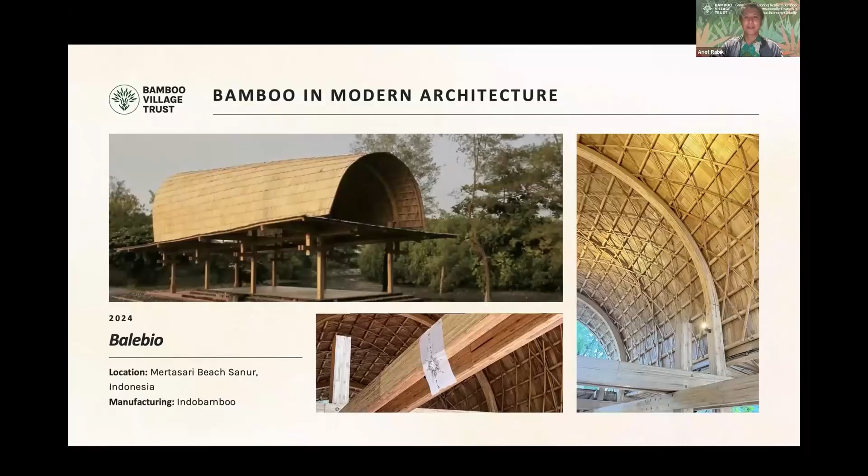In terms of a partnership model for the Bamboo Village Trust, we look at strategic implementation partners as really our main focus for reaching out and working with. Under strategic partners, we want to help them find enough backbone landscape partners within arm's reach - landscape partners with a solid backbone. For example, one strategic partner being able to take on 20 landscapes with different backbone landscape partners. And of course, identifying an entrepreneur champion, not a farmer champion, with each bamboo village, giving that entrepreneur everything we can to scale them and create an enabling ecosystem around them.

So to all strategic partners out there, if you're interested, we're excited to grow the Bamboo Village Initiative with you and your landscape partners. This is a beautiful photo of a lady in Flores taking the branches - 1.5 to 2-year-old branches of asper - and being able to make more bamboo. Every time we harvest one asper, we get 5 to 10 of these branches that they can propagate and make more clumps of bamboo. So it takes a village. Thank you very much for this opportunity.